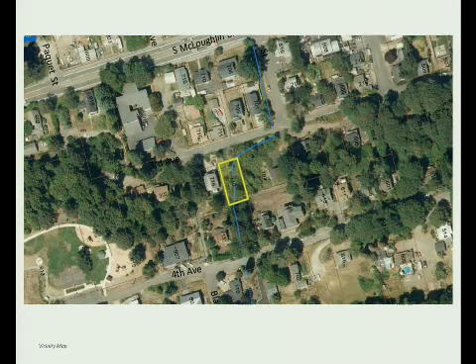There is a channeled stream that runs through the middle of the property and then turns onto 3rd Avenue before continuing down to McLoughlin. The property is within the historic overlay, Willamette River Greenway overlay, natural resource overlay, and the geologic hazard overlay. The applicant did submit applications for geologic hazard review and natural resource overlay review earlier this year.

So those applications have been submitted, but the reviews have not begun, as the applications are incomplete at this time. Those are both staff level reviews. So when the application becomes complete, we would review it as a type 2 application with public notice, then a staff report and decision.

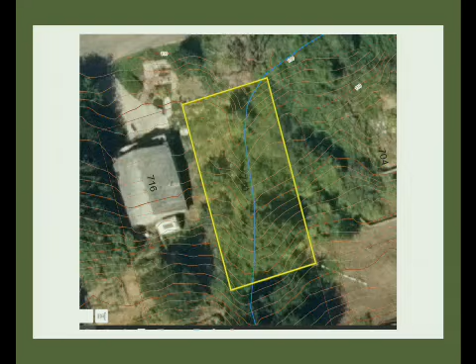So here are some recent photos of the property. There are a few trees on the property. It's not clear how, what size they are. But all of the vegetation on the property would be regulated by the other overlay districts, the natural resource overlay review. So if any tree removal occurs, mitigation is required.

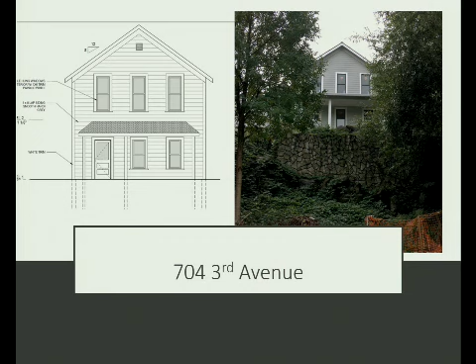Neighboring property, 704 3rd Avenue. This was approved by the board last year and is almost complete. You can see the view from the street there of that property. That's on a 10,000 square foot lot.

And then the other neighboring property is 716 3rd Avenue. This is a home that was built, I believe, in 2007 - 1997, sorry, I'm 10 years off. So 1997, new construction went through historic review under the old guidelines.

So for the site plan, we've got a fairly small footprint for this home. The applicant, I think, is intending to keep the overall disturbance area, including the footprint of the home and the driveway, less than 1,500 square feet in order to meet the requirements for the natural resource overlay district. So there's no garage, either attached or detached. It's just a 20-foot wide driveway that is mostly in the right-of-way.

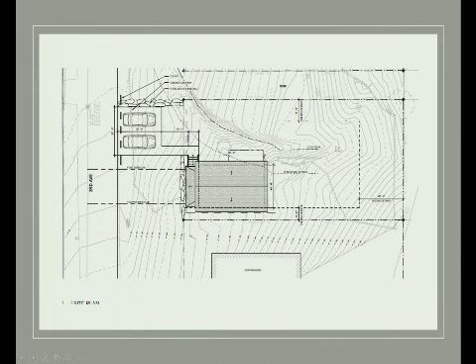The property line, if you can see my cursor here, the property line is right here. So the driveway is almost completely within the right-of-way. And then the porch would be almost right up to the property line here. And then the stream is shown in the channel right there.

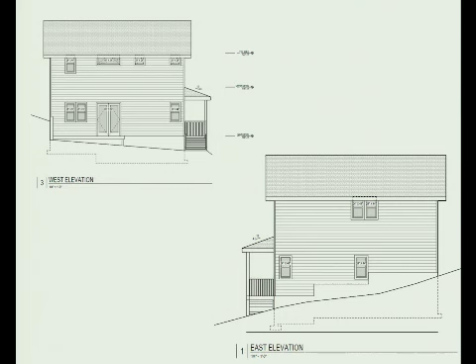So the applicant proposes a vernacular style home. Again, the size and the mass is quite small due to the constraints of the site. And the design is very similar to the neighboring property that was just built - a full width front porch with a hip roof, 8:12 pitch. Generally, the design meets the guidelines.

Double hung windows are proposed. The overall square footage of the home is, let me make sure I get it right here. So the home's 18 feet wide, 30 feet deep. Sorry, I'm not finding the exact footprint or square footage, but it's 1.5 stories.

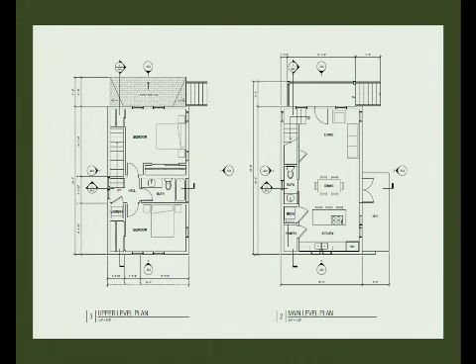With no basement. So this is just a comparison to the house that was just built next door. Now that house does have a porch and staircase to the side, which isn't shown. So imagine a similar looking porch rail and stair on that house on the left. This is just for comparison purposes - they're quite similar.

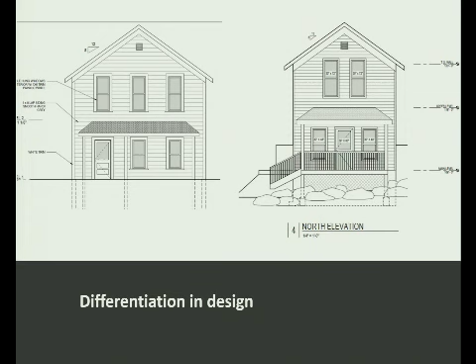And so the protection of this creek is relevant to the natural resource overlay review process, but also for historic review as well, because it's a creek that is mentioned in that nomination form and is part of the character of the district.

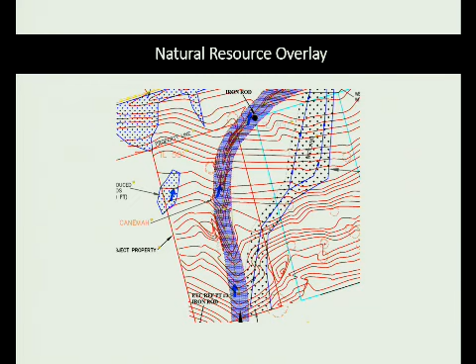There's also a wetland shown, a very small wetland that was found when the property was investigated by the environmental consultant. The footprint of the home would be where that wetland is, partially. I'm guessing that the state would not regulate a wetland of that size, but if it does, then there are state requirements as well that the applicant would have to meet.

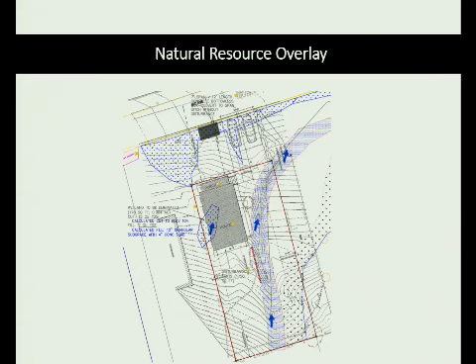So there you can see where the house footprint is. The proposed setback appears to be about 7.5 feet from the stream to that corner of the house. And again, there's no criteria for setbacks, no strict standards for that in the historic design guidelines. A 7-foot reveal is remarkable. 7 foot?

7 inch, my apologies. The materials proposed generally meet the guidelines, but the applicant did not specify the materials used for the porch. So there's a recommended condition that wood decking, railing, and stairs should be required. Lately, everyone's been asking to do composite decking. That wasn't specifically requested here, but if it's desired, it needs to come up at this hearing, and if the applicant wants to do it, it needs to be requested today and approved by the board.

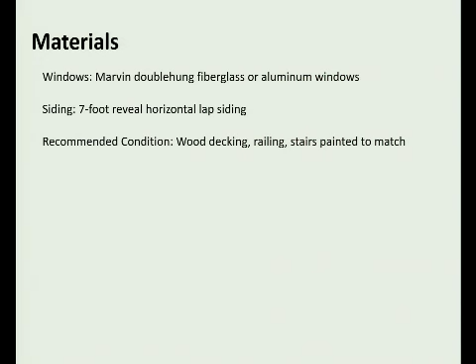So I had a recommendation for preservation incentives. One of those, I learned more information today, and I want to retract that recommendation, potentially requiring more information before I would want to make a recommendation to you on that. But first,

The R6 zone minimum setback for a porch would normally be 5 feet. This porch is almost at the property line, maybe a foot setback or so. I think it's appropriate to allow the setback to be reduced in this case because it helps to separate the house further from the creek, and the amount of unimproved right-of-way between the pavement on 3rd Avenue and the property line is quite large. So there's a lot of space there, meaning the house isn't going to be up very close to the pavement of the street.

So the second recommendation that I'm retracting is the recommendation to allow a 0 setback on the side, which would have allowed the house to be further from the creek. However, this site plan appears that it might not be accurate as far as the placement of the neighboring house. I spoke with the neighbor, the owner of that property today, and he informed me that his setback from the property line is actually only 5 feet, whereas this showed about 12 feet here. So with 12 feet, I thought that the 0 foot setback might be appropriate. If this house was really only 5 feet from that property line, then I don't necessarily recommend moving this one even closer to that. So we don't necessarily... I don't have a survey, I don't have boundary surveys to reference. I only have the information shared with me by the neighboring property owner.

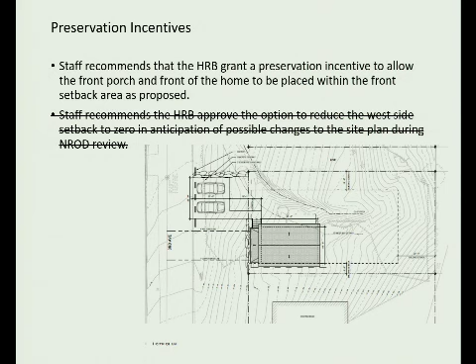So there shows the setback to the creek, and then that if you do measure 5 feet from that property line, then this house is actually right up here.

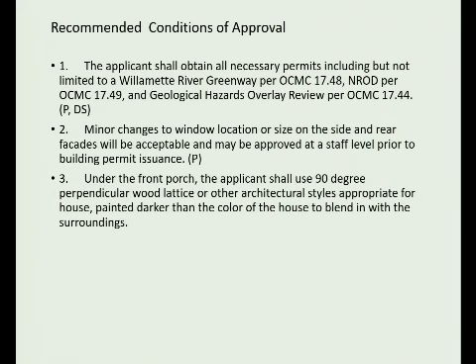So my recommended conditions of approval are pretty standard. Under the front porch, the applicant proposed a diagonal lattice that should be perpendicular wood lattice. And then using wood for the deck, planting shrubs in front of that foundation of the home, that exposed foundation, and making sure the porch rail includes a top and bottom rail.

One thing I want to potentially add is that I believe the HardiePlank siding was proposed. A 7-inch reveal is perfectly fine for vernacular, but I don't know that smooth HardiePlank was specified, so I think adding a condition for smooth HardiePlank would probably be a good idea. I apologize for not catching that earlier. So I am available for questions.

Is there still a reduced setback on the west side with the current application? So the current application is for a 5-foot setback, which meets the underlying base zone setbacks and would not require a preservation incentive. But the proposed front setback does require a preservation incentive, or otherwise they would need to move that house back further on the lot.

So that's just the roof on the site plan there. The way the line's drawn, it looks like there's an overhang a little bit there right now. Oh, so I think the roof overhang? It's just the roof. Yeah, I believe that dotted line, dashed line there is actually where the wall of foundation is. Okay, the actual footprint, yeah.

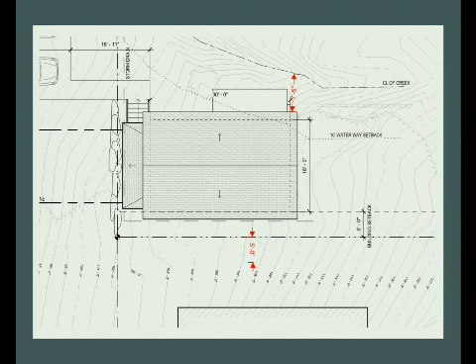So the 7.5 feet to the creek is counting the 5-foot setback? Yes. Okay. And again, this proposal may or may not meet the natural resource overlay requirements.

Is there any additional information in the application? I visited the site but haven't walked up onto the property. What exactly, what part of the channel or the basalt structure in the channel is historic, and what alterations would be made to that part?

My understanding is there wouldn't be any alterations to the basalt channel itself. There would need to be robust construction fencing to protect that area during construction, but there's nothing currently proposed to change or modify that stream or the man-made channel.

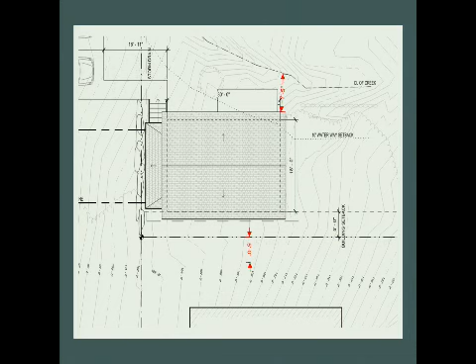I think most of your concerns regarding the creek and its specific location are matters to be taken up during the natural resources hearing process. We don't have access to, and we're not experts in, that material. So we deal here strictly with the design. There will be a natural resource hearing - a natural resource committee will take it up, hearing it because of the NROD.

You'll be notified, and it's a staff level review - I could only comment on it. You'll get a notice, and there will be a public comment period. There is a natural resource review process that does go to planning commission in some cases, but I don't know that this will rise to that level - it depends on the details of the application.

Trust what she said, not what I said - she's on top of it.

Regarding the setback to the property line, we've already heard from staff that the 5-foot setback will stand, and there won't be a request to move the footprint closer. So it has to be 7 feet to the creek? No - what's proposed is 7.5 feet, but there's no clear and objective minimum number. It's through the Natural Resource Overlay District. If the footprint of the home is this small, there's no necessarily minimum setback from the stream.

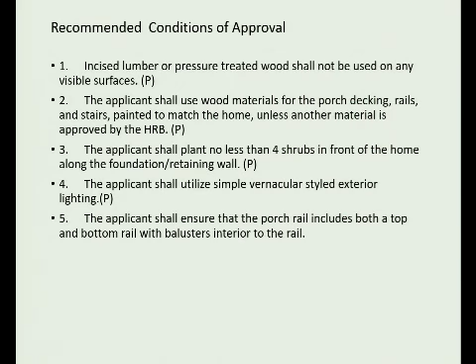Move to approve GLU HR 19-00003 for new construction in the Canemah National Register District at 710 3rd Avenue, with the additional condition, subject to the condition that the Salt Creek channel not be disturbed.

And that the west side setback is removed, right? Well, that's already in there. I thought you took that out. So you would be approving it with the preservation incentive for the front setback and not for the side setback, right? Correct.

I'll second that motion. Okay, I don't know what order to go in now. Board Member Blythe, aye. Board Member Met, aye. And Chair Basinger, aye.

The application is approved.

And we will move on to the next item on the agenda, which is design advice for new construction in the mixed-use corridor in the McLoughlin Conservation District near Fifth Street and Monroe—Fifth Avenue in Canemah.

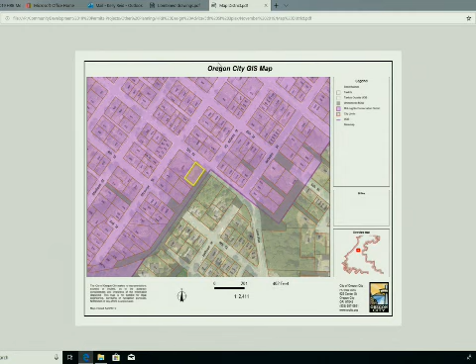So the applicant has proposed—let me see if I can break this down—a mixed-use development that consists of a small commercial studio on the ground floor with the entry door, and then the remainder of the building would be a single-family home with an attached garage.

So I believe the applicant has described this as a bungalow design, bungalow style. I don't particularly think that it has a lot of bungalow elements, but...

The design guidelines for commercial development outside of the 7th Street corridor—so in the 7th Street corridor, we talk about streetcar commercial design. Outside of the 7th Street corridor, where the zoning allows for commercial or non-single-family development, the guidelines call for Queen Anne or vernacular style that looks residential in nature but can have a commercial use within it. So a bungalow design does not really fit the guidelines in this particular case, although in McLoughlin in general, bungalows are appropriate for single-family homes.

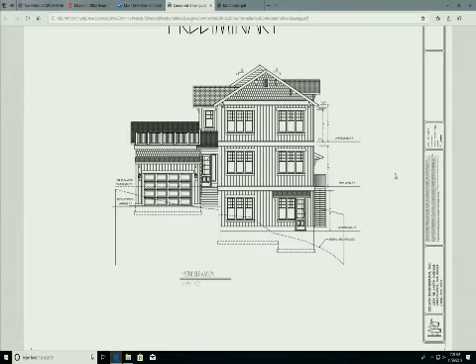So the side elevation—this is on the uphill side—and then on the downhill side, on the side of the Guild Mortgage building. And then the rear elevation.

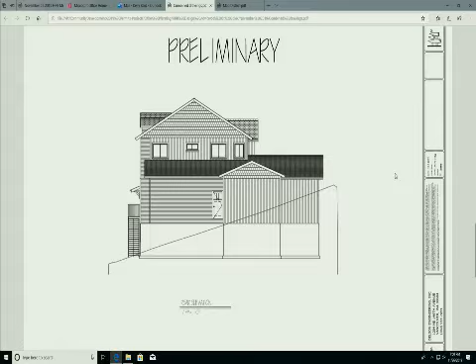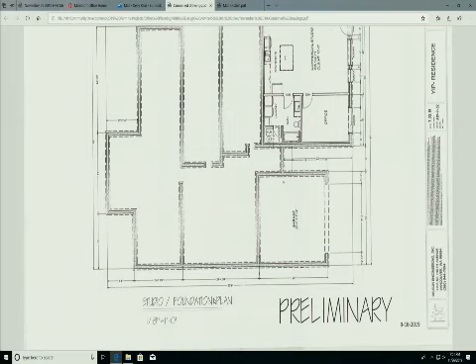And then you can see the small commercial studio here, and then the remainder of that is the residential use, and the upper stories are residential use as well. This meets the mixed-use corridor zoning as a live-work unit. It is a permitted use in the mixed-use corridor district. The applicant will also have to go through site plan design review for that, which is a staff-level review required of any development in the mixed-use corridor zone.

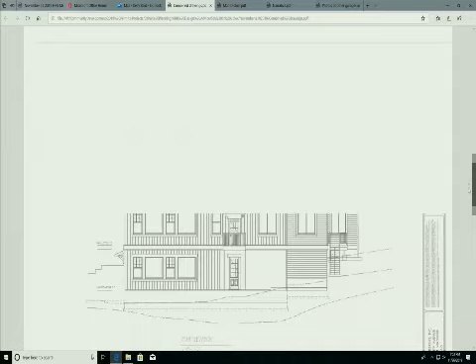So those were included as well. And so, I've mentioned some parts of the guidelines. I think there are a few other guidelines that this design doesn't necessarily meet. Overall, the massing is pretty large, so I think there might be some comments on that from the board, but I certainly haven't thought of everything.

See what the applicant has to say. That's all I have. Okay, thank you. Is the applicant here? You want to come up and we'll talk about what is happening here. So you've heard the staff reaction.

John Delson, Engineering. So we looked at the requirements for this particular site, and as you notice, perhaps we can pull the site plan, preliminary site plan.

I don't think we got a site plan. Sorry. I don't have a site plan, but I have that.

The site plan shows that we had to take care of a couple things here to design the building on this site. First, we have to deal with the slope, as you can notice from the rear left side, sloping down towards the Guild Mortgage project. And more importantly, the geotechnical hazard zone.

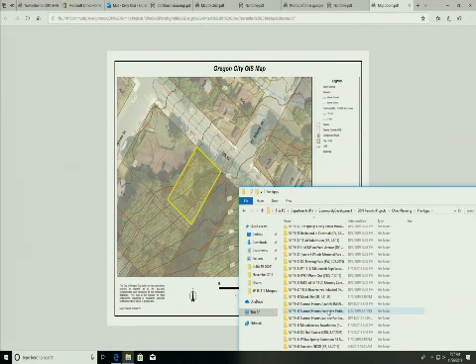I'm going to pull up the site plan here in a second. If not, we can see from the elevation kind of how the ground works.

We also hired an independent soil engineer to do an investigation on this site, and this is according to his recommendation to develop this site as well—not only the city's requirements, but how to stabilize the soil and how to develop this.

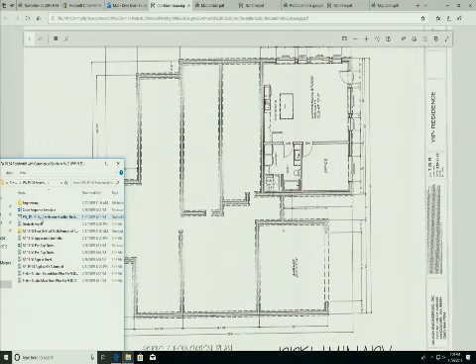So this is the basement, and on the left side at the bottom you see the garage. The bottom side will be all retaining wall, but step-down foundation to minimize the cut, minimize excavation, to make it more economical and take care of all these three items. And the studio also faces the street.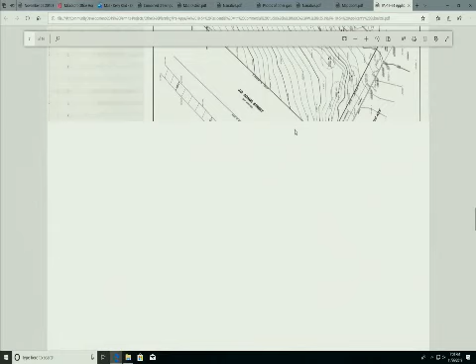So the garage is pulled back according to other city standards—they don't allow the garage to be in front of the building. This is pulled to the back, with the driveway sloping about 15%, so we can minimize the cut and hold the soil. And based on this floor plan, we see the topography.

Did you want to look at this site plan drawing? Oh, this is kind of a preliminary site plan. Yes, yeah. No, this is the old one.

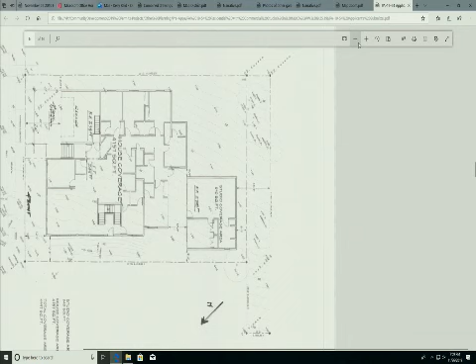That's all I have. We put the studio in the back, but according to the new guidelines, the studio needs to be facing the street. Well, that's the only one I have on our server. I do have a 24 by 36 page of the site plan, but nevertheless, from Adams Street you see how the slope is working here.

So we developed these floor plans that we think fit the best, not only for the geotechnical and sloping conditions and the city criteria, but also what the owner wants to accomplish. The owners have a fairly large family, and this is the footprint, the number of bedrooms they require, and also the commercial studio.

The commercial studio will serve the need of the owner because she's trained in the medical field, and she's giving classes and training CPR and other classes. And there would be work and live to meet this criteria.

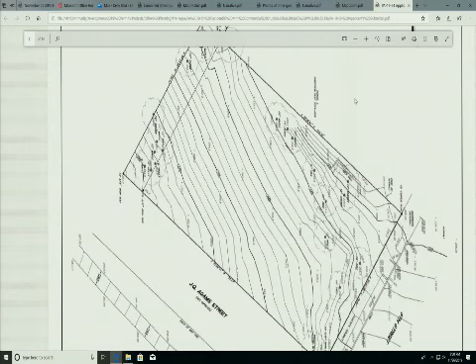Based on this floor plan, we developed the elevations. If the committee feels appropriate, we can modify the elevation. However, the floor plan, we would prefer to remain as it is with the location of the garage and the studio, according to all these necessary requirements. The slope, the lot, is very difficult to develop. Realistically, walking down the street, we see many homes with the garages facing the street, so we don't think that this would necessarily compromise the requirements.

Well, as you know, the reason we're here is for design advice, to make suggestions that will help you get through the process and the eventual design review. And in that regard, as I look at this elevation, I see some design cues thrown in there, but I agree with staff that they're not elements of a bungalow style.

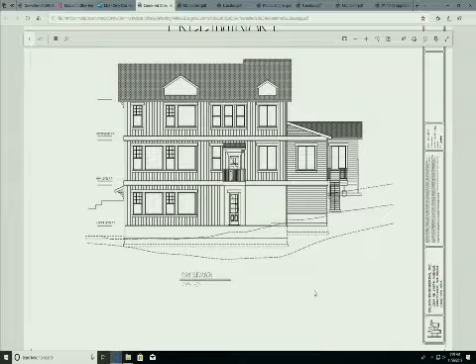On the garage, some of the mitigating factors we've used to approve attached garages are that they're not on the main elevation of the home, not on the front facade. The geography requires them—potentially in your case the geography and terrain on the site is a little difficult—but the garage is kind of front and center and displayed, so that's certainly not ideal. I would generally prefer to see a detached garage there, especially since it seems like there's space on this site.

Actually, if you look at the site plan, there is no way to put the garage detached. As I was explaining, because of the sloping condition and geotechnical requirements, the retaining wall and the slab in the garage serve as protection against sliding. And again, we found about 6 homes on the same street, the same block, with the garages facing the street.

One thing to look at is that I would imagine the garage can serve as the retaining wall there without being attached to the main structure of the home. It could still be in the same location without being physically attached to the main residence.

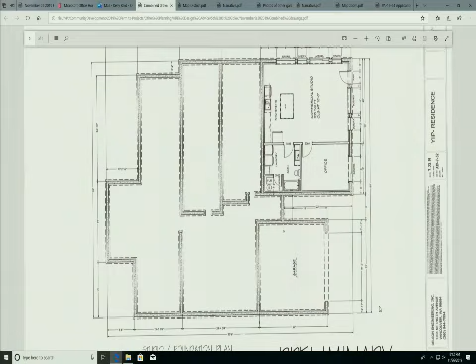Can we have the floor plan? Main floor plan—yes, so the garage. This is the basement. The garage appears to be detached for about 14 feet, but of course we have to have entrance from the garage to the main building, and on the main floor plan, that's the basement. If we can show the main floor plan—this is the only one I have, except for the old version from your meeting.

Is this it? That's the ground floor? Yes. And you want the next one? No, this should do. So we see we have the entrance from the garage to the stairs, which have to go up.

So if we detach, we would have to eliminate the entrance, so to speak, right? I don't see how it's geometrically possible. But visually from outside, it's like 14 feet of space between the garage and the building. All the other 6 out of 8 homes have it basically attached to the building.

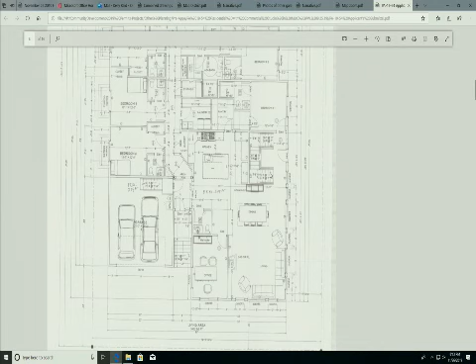Not to mention the Guild mortgage building—I don't know if you're familiar with it. Have you seen this building? No matter what we do, we will not match that neighbor, from any point of view—historical, aesthetical, or anything. This building is from the 1960s, used to be the Fifth medical Guild center. It's a one-story with almost flat roofs.

No matter what we call this new style, it will never match the neighbor. We call it historic, non-historic, contemporary, whatever we do, it will never match the neighbor. But the idea of the garage, as I say, is taken from that street. So I understand the guidelines are guidelines, but the guidelines should be guided to that block or area, not necessarily 2 blocks from there or half a mile.

But most of those are either single car, smack up against the house, set back more, or built underneath the house as part of, you know, a style that was very common back then. There was once 1-car garages and 2-car garages. We have pictures, but we could reduce to a 1-car garage if that's the problem, I guess.

Well, if you did that, if it was a 1-car garage, you could have it as a separate structure. Not a good idea, but as I say, if we cannot have a 2-car garage, we could reduce from 22 to say 10 more feet, have a 1-car garage if that makes a big difference. But again, for any reason, entrance from the garage to the house would be desirable.

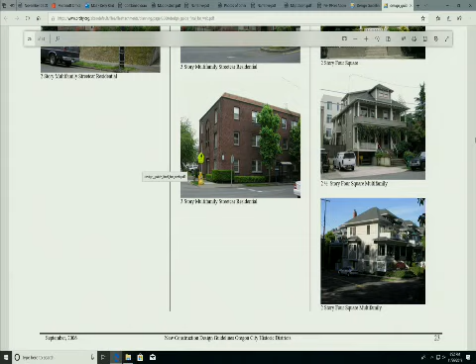I just wanted to pull up the page that shows some Foursquare examples since we talked about that. There you go. Those are not commercial, these are examples of Foursquares that are in our design guidelines. They generally have a centralized stairway entry up to a porch, and then the half story on top is a half story with dormers generally.

Yes, we could modify the front elevation like this, and the site was simply dictated as I say. The neighbor is kind of, I don't know if it is even modern or contemporary, the Guild Mortgage building, and basically the owners would prefer to have a view on that side, more windows, bigger windows.

Well, we can eliminate some of the windows and match the style, more than happy to. That's not an issue, or shouldn't be an issue. We need to, and also we can center the entrance.

The entrance, if we look at the elevation, is a little bit different, but we could make at least the bottom level centered, and the upper level. We would have to cut the square footage, however.

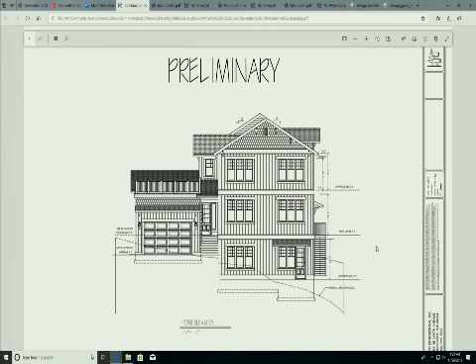We need to take this 3-story front side and make it like a 2-story. The dormers, we definitely need to cut the upper level, which is for the owner. The main level is for mostly the family. She's taking care of elderly mother and some sisters. It's a big family.

Difficult challenge.

If we make recommendations, since this is design advice, does it have to come back to us, or can you work with our notes?

I have been taking notes, so there's video of this, and I've been taking notes that I would then share with the applicant. Design advice is non-binding. I should have started with this, but it's informal, non-binding, so anything said here tonight does not necessarily mean that it's going to be like that in the future.

And the board members are giving their individual advice and not as a board. So I would share the notes, and then of course you have access to the video of this meeting that you can always go back and review. Then you can turn in your application, and you would come back to the board for an actual public hearing. When would that be? Whenever you turn in an application and it's complete, we would schedule you for the next hearing.

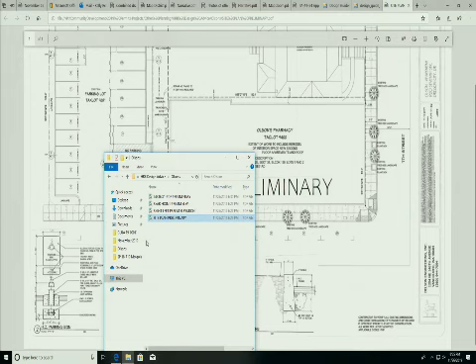Oh no, so this is the site here on the corner of 7th. There's an existing parking lot behind that would serve the new building. Here we go, so these are the 4 documents that you sent me just now.

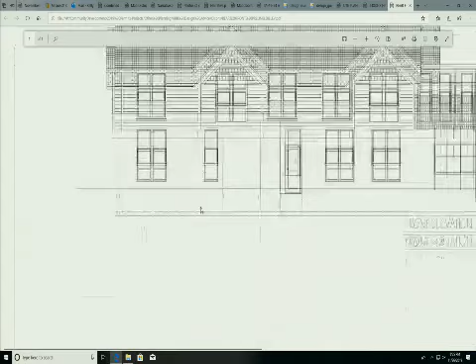We have elevations, rear and front. So there's an existing historic building next door that is a multifamily structure behind it. So the design of this building is meant to kind of play off of that one, with these 2 symmetrical elements matching the historic building.

So is this the front here? We will call it front, yes, that would be on 7th. Yes, because it's on 7th. Okay, and I think what we talked about is moving the entry to 7th. Correct.

And that would be the rear, and then we've got the Monroe Street side here. The entry for the commercial space would move to 7th as a requirement probably for this board and for site plan design review requirements.

And then this is the facade that would face that neighboring building, and it's built with almost 0 setback, which is historically appropriate and probably matches what used to be there. I remember the drugstore.

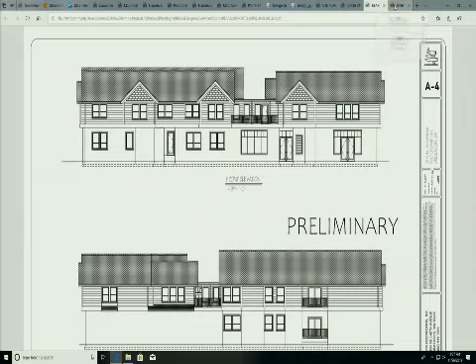So this design is very similar to what was submitted in 2014 to the board, and I believe that was approved at the time, and then the approval expired at this point. Oh, so there was another one before I came back on the board. In 2012, there was a 3-story design approved, and then in 2014 it was modified to a 2-story design, similar to what you see here, and that was approved.

And then the applicant didn't move past that stage, and now they're back with a very similar plan. I think the compatibility with the neighboring design speaks strongly in favor of that, the style, because it's got multiple roofs and dormers and stuff like that.

So on my end, I don't really have any major comments on this. There was one item, I think - we have a ground floor retail space with a minimum floor to ceiling height, and that sometimes gets reduced to be proportional to neighboring historic buildings. I think that would probably be the case here, where you wouldn't want a huge, really tall ground floor, because you're trying to mimic the building next door.

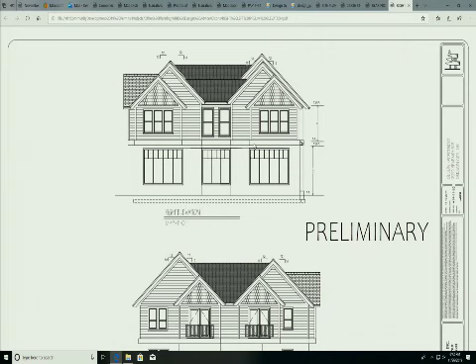So I like it, thank you. Nice to have something on that spot. I think it's pretty good, pretty close to what would fit there. And I like the window difference between the commercial and residential, where it really defines it.

The owner used to work for the pharmacy. Oh, you're kidding, that was where we went all the time. It was right up the street.